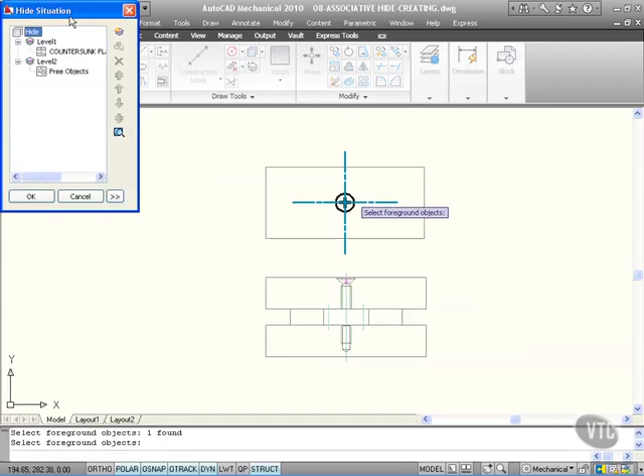So I now have my hide situation dialog box here. You can see that my countersunk flathead screw is at level 1. Now the free objects there are actually the center lines. What I'm going to do is move those by clicking and dragging up to there, so they're on level 1 as well, so they're all on top, so to speak.

Now I'm going to OK that, like so. So I've created my hide situation.

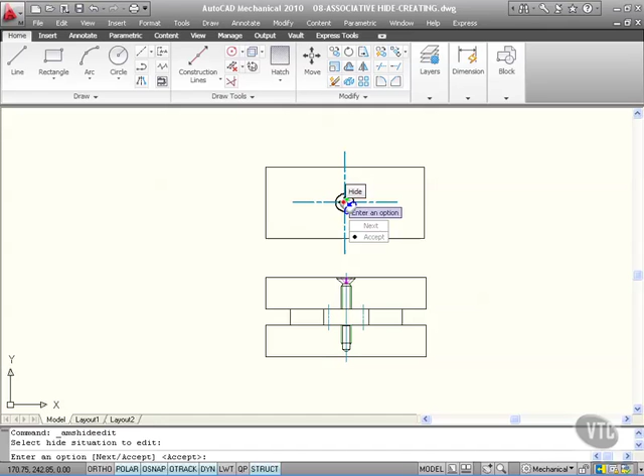So if I go back here now and click on Edit and select the hide situation to edit, I can go back here like so, and I can enter an option, Next or Accept, and it brings up the hide situation again. We'll look at editing our associative hide in the next exercise.

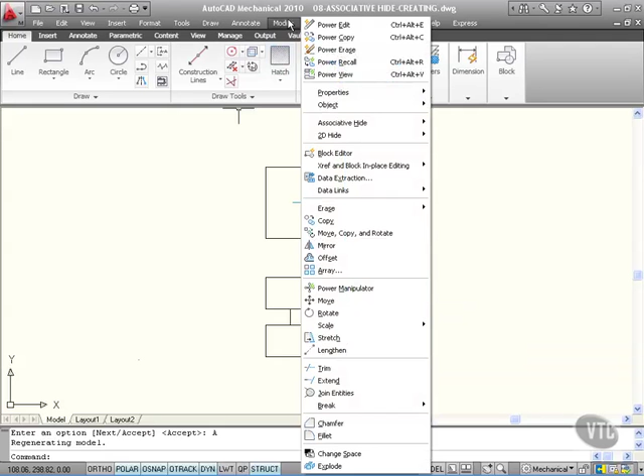But what I'm going to do now is bring in another object. So I'm just going to OK that there, and I'm going to bring in another object now, and that's going to be my top view of my slotted hole. So I go up to Modify, Power View, like so, and I select my slotted hole there.

There's my ISO slot there, and I want the top view of it. So I bring that into the drawing, I zoom in, I'm using the intersection of the center lines and the rotation angle 0, and press enter.

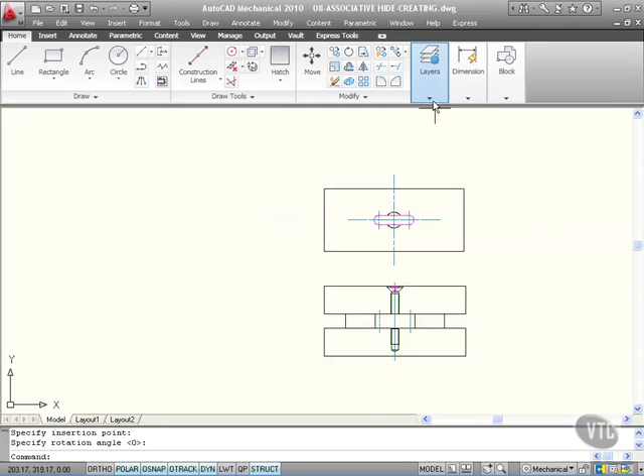Now this is where it all gets a bit interesting, because as you can see, my slotted hole has gone on the appropriate layer, which is the hidden detail layer, AM3, but it's placed itself on top of my countersunk head screw. So what do?

Well, I have to edit my associative hide situation. So what I'm going to do is do that in the next exercise, where we'll look at editing our associative hide so that we can bring our countersunk screw to the top and put our slot below the countersunk screw. So let's do that in the next exercise.